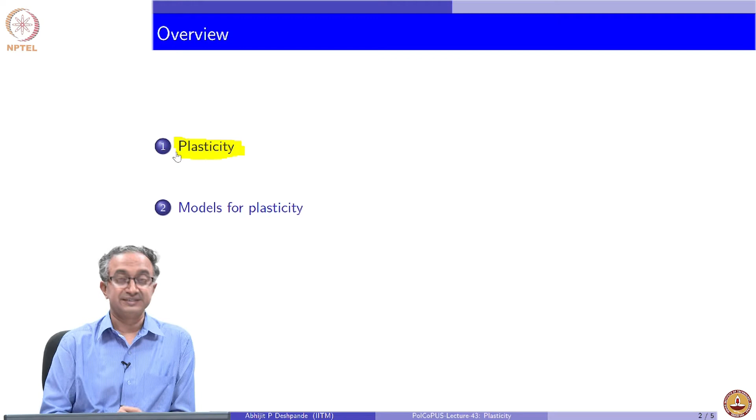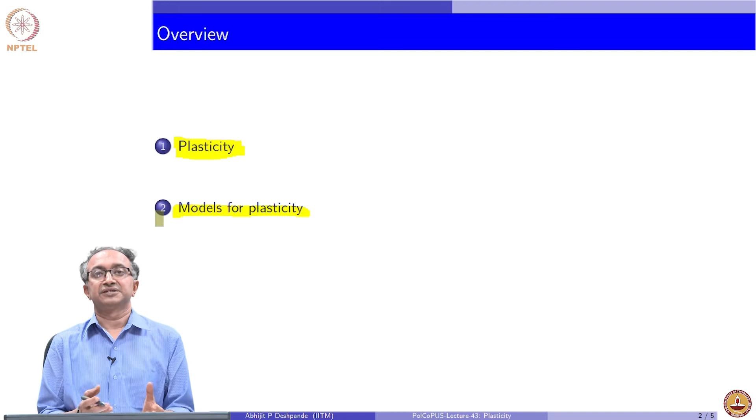In this particular lecture, we will again come back to mechanical performance and look more closely at the phenomenon of plasticity. In fact, given that many kinds of polymeric systems are called plastics, it should give you a hint that plasticity is fairly important in deformation of various polymeric materials. So, our focus will remain, of course, on the mechanical properties. We will look at plasticity, what it means in the context of polymers, and then look at simple models which can be used to describe the stress strain relationship in a plastic material.

So, yielding is a phenomenon which is central to plasticity. What we have in material is that there is a limit on strain or stress, let us say 2% or tens of megapascals or few megapascals in case of weaker polymers. These materials can withstand only a certain amount of strain or stress, beyond which the elastic deformation is no longer valid. The elasticity in this case implies that the state of stress is defined by the state of strain alone.

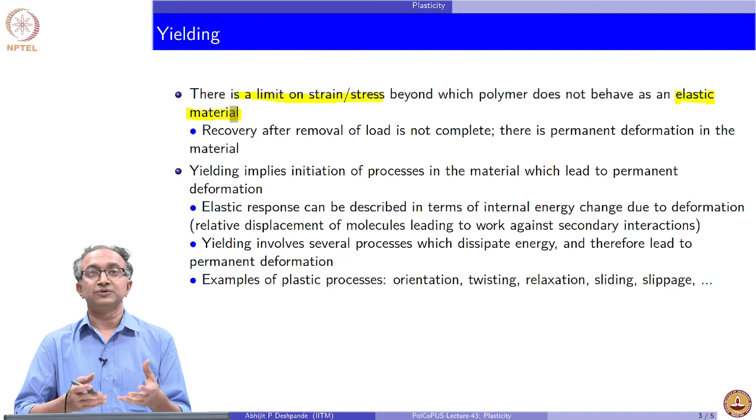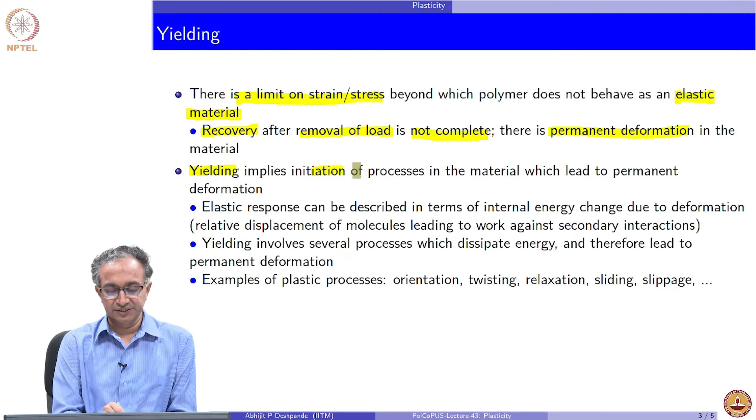And this also implies that if stress goes to 0, then strain also goes to 0. That is what we mean when we say there is a recovery. When we go beyond this limit of strain and stress, recovery after the removal of load is not complete, and that implies a permanent deformation in the material. So, plasticity is associated with permanent deformation, deformation which is not recoverable, and therefore, yielding implies initiation of processes in the polymer which lead to permanent deformation.

So, yielding of polymers implies that at the macromolecular level, at the microstructural level, the deformation leads to phenomena which lead to permanent deformation. So, what could these phenomena be? If you remember, most of the plasticity will be associated with polymers which are below their glass transition temperature, which means segmental mobility is absent. In case of rubbers, plasticity is irrelevant because segmental mobility is there, and we generally observe largely elastic behavior in the stress strain curves, as we saw in the earlier lecture also.

So, the glassy state and chains in the amorphous material seem to be amenable to plasticity. Similarly, semi-crystalline polymers in their glassy state, where there will be a mixture of amorphous and crystalline states, can show plasticity. From an energy point of view, the elastic response is described based on internal energy. When we deform the material, pull the atoms and molecules apart, the internal energy changes, and when we release the load, the material comes back to minimize the energy.

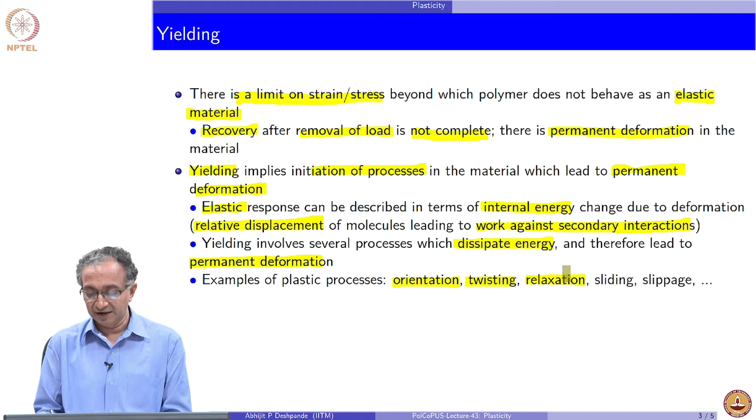As I mentioned, we can have orientation of chains, chains twisting, chains relaxing over some amount of deformation, and crystals sliding over each other, slippage of different domains with respect to each other. These phenomena are all dissipative in nature, in the sense that the mechanical energy put on the material to deform it is taken up by the material, and therefore, recovery is not possible.

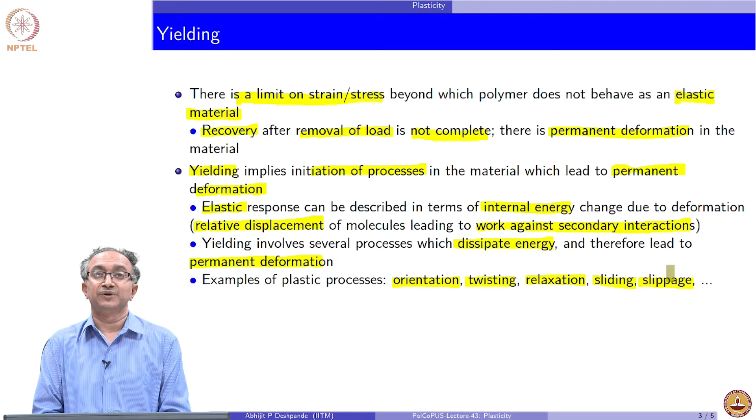There is strain softening, in which case proportionally less stress is required for more and more strain, but we can also have strain hardening, in which case more and more stress is required as we apply more and more deformation. So, strain softening and strain hardening would depend on what mechanism is at play: the orientation, stretching, twisting or slippage, all of those phenomena that are taking place.

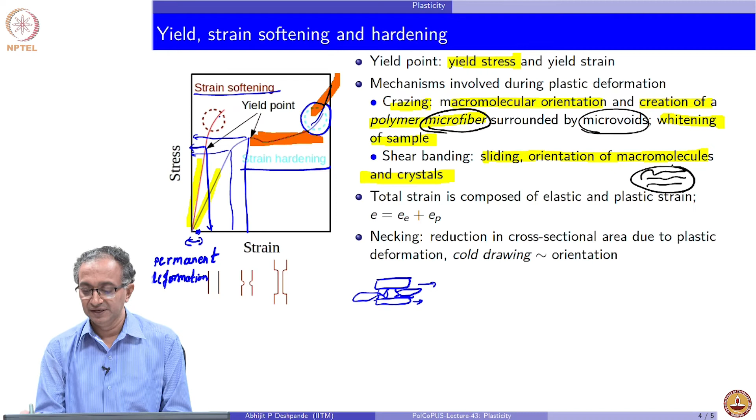That is due to the macromolecules orienting themselves, and due to this orientation they form a fibril, and because the chains are coming together and getting oriented, micro voids form between the microfibers, and that is what leads to whitening. Whenever you have these density fluctuations, a region of polymer, then a gap, then another fiber, light scattering takes place and the material becomes white.

So, crystal sliding, chain orientation and such phenomena are important during plastic deformation as well as crazing, depending on the polymer. The total strain in the material is composed of the elastic and plastic strain. There is an amount of strain which is elastic and can be recovered, and then there is a permanent deformation.

One of the important phenomena we ought to understand is that, because of all the sliding and orientation, the polymer sample starts reducing in cross section, and this phenomenon is called necking: reduction in cross-sectional area due to plastic deformation. We also use the term cold drawing to describe this. Sometimes if we have made a fiber and we would like to make it even stronger, what we can do is plastic deformation.

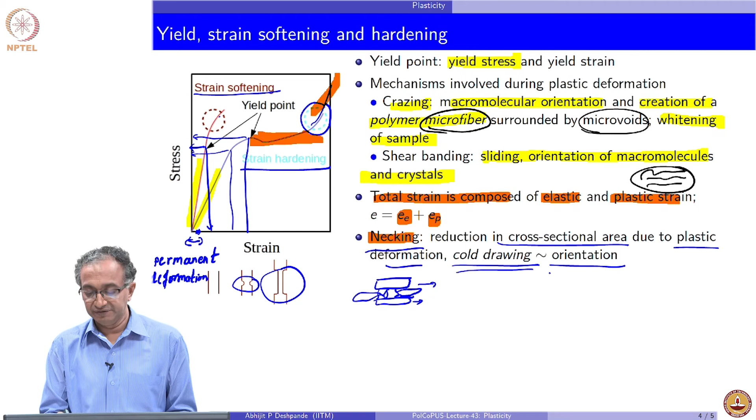So, we can stretch the fiber to much more extent than what its original diameter was, and then due to orientation that happens in the polymer fiber, we can get a much stronger fiber. So, therefore, cold drawing is a standard way of improving mechanical properties of fibers and sheets by achieving a specific orientation. And of course, this we have already seen in lecture 19, where we looked at how orientation in a polymeric sample can be influenced.

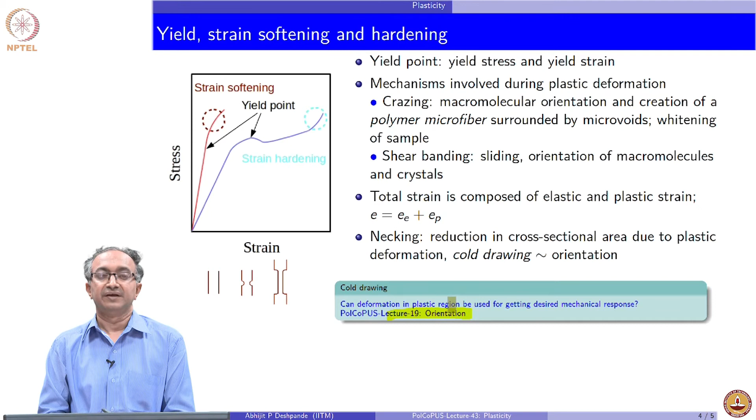So, the simple models which are useful to describe the plasticity in polymers: plasticity by itself is a fairly complicated phenomenon for two reasons. One, we have to look at all the dissipative mechanisms that take place, and though in words it seems fairly easy to describe that there is orientation of chains, or there could be crystal slippage and crystal orientation, to describe them mathematically using equations is quite challenging, because how do we quantify orientation, how do we quantify the extent of slippage, if there are defects in crystals, if the defects are themselves also migrating, then how do we quantify that? So, in general the phenomena of plasticity is quite challenging to describe.

The other aspect related to plasticity in case of polymers is that the viscous nature is also always there. So, you might hear the term in a metal context describing elastoplasticity. And as the name suggests, it is a combination of elastic and plastic behavior. But in case of polymers, what we need to really look at is elasto-viscoplasticity.

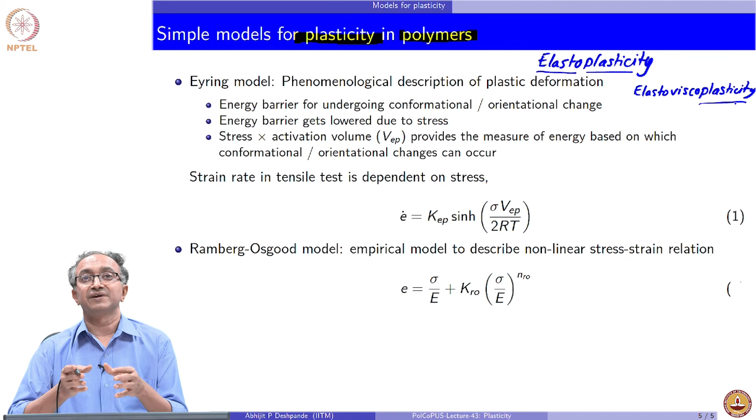So, plasticity implies the phenomena that we talked about, where we have chain twisting or crystal orientation and things like that; viscous phenomena will imply the segmental relaxations and segment conformation changing and so on, which are very important in case of polymers. So, many times it is difficult to ignore viscous effects during understanding of the plasticity in case of polymeric materials. And of course, elasticity is always involved because at small deformations the material is elastic, and even when we impose large deformation, part of the deformation is elastic.

So, one of the ways in which we can make hypothesis regarding plasticity modeling, and both the models which are discussed here are used for a variety of materials including polymers. So, these are both phenomenological descriptions, by which we mean, since we know the shape of stress strain curves and since we know the kind of stress strain behavior that is shown by many plastic materials, we can try to capture it using mathematical equations.

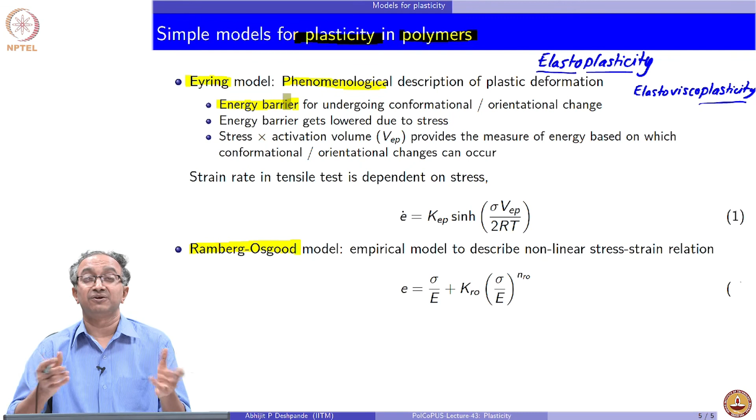So, the hypothesis behind the Eyring model is that there is an energy barrier for undergoing the plastic processes. So, for example, for a slippage to happen, there is an activation energy barrier, or for a conformational change to happen, so twisting of the chain or unraveling of the chain, for these phenomena to happen, there is an activation energy barrier, and this activation energy barrier is lowered because of stress. So, the material always has a tendency to have plastic deformation, but when no stress is applied or when less stress is applied, these plastic mechanisms do not really take place because of the energy barrier.

But as soon as stress is increased beyond a point, the energy barrier is lowered, and then these phenomena start happening. So, therefore, there is a hypothesis of an activation volume, and that multiplied by the stress gives you the measure of energy based on which these plasticity mechanisms can happen. And so, based on such hypothesis of the material response, the strain rate in the material is related to the stress, and of course, the activation volume.

So, here you can see clearly one aspect. As soon as we are discussing non-elastic response, rates start playing a role. So, in this case we have strain rate dependent on stress. Similarly, in case of a Newtonian fluid also, we will see of course that sigma is related to viscosity times strain rate. So, in viscous and plasticity effects, the rate effects play a significant role, while in case of elasticity only the present state of strain matters, and therefore, rate effects are completely irrelevant.

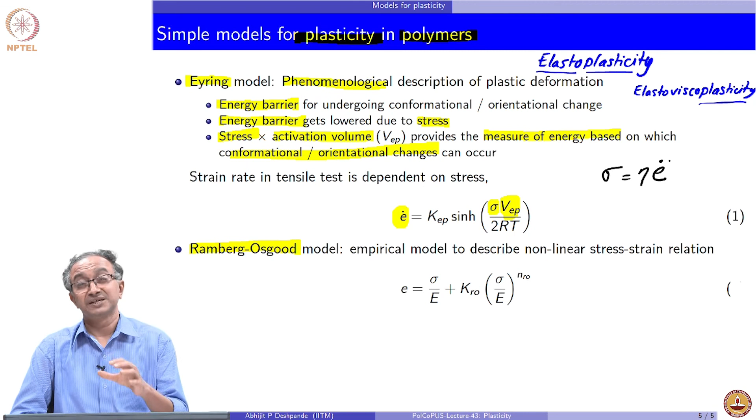Now, the complication with polymers is that they can show elastic behavior under some rate conditions, and they may show plastic behavior under some other strain rate condition, and therefore, we always need to look at what are the time scales of our experiment in relation to what is the time scale of the material. And this idea, of course, we will discuss a lot more when we discuss phenomena of viscoelasticity.

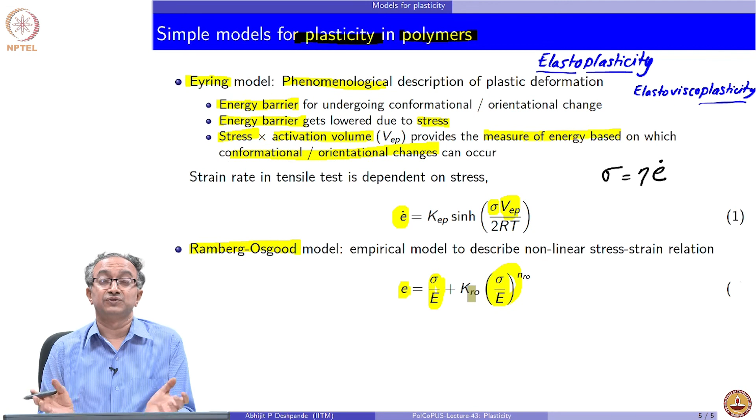The Ramberg-Osgood model is a more simple model, which just says that the overall strain is the summation of an elastic strain and then just a power law nonlinear strain, and when you sum both of them you can get the overall strain. So, with this we have scanned the mechanisms associated with plastic deformation in polymeric materials. It is important for both amorphous as well as semicrystalline thermoplastic materials.

In thermosets, we will not observe plastic deformation, and I hope that you can try to rationalize why this would be the case, that thermoset polymers will have mostly elastic deformation and then there will be failure. There will not be any plastic deformation. So, think about it.